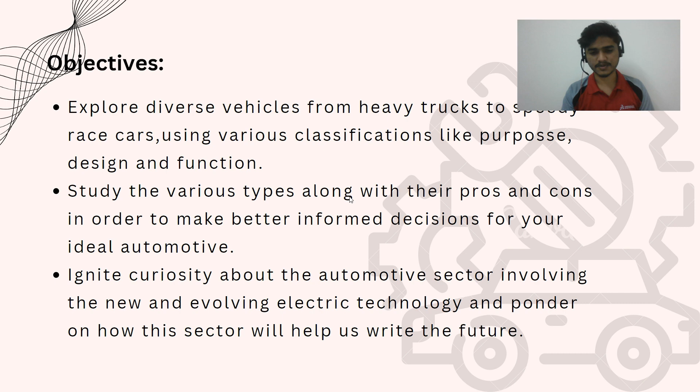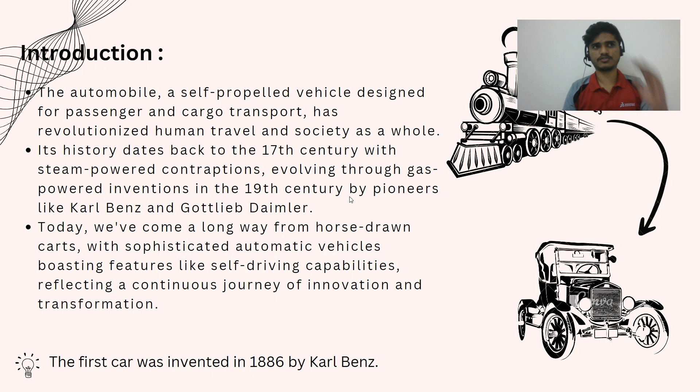Now, getting introduced to the automobile, let's see how it started. The automobile, a self-propelled vehicle designed for passenger and cargo transport, has revolutionized human travel and society as a whole. Its history dates back to the 17th century with steam powered contraptions, evolving through gas powered inventions in the 19th century, where pioneers Karl Benz and Gottlieb Daimler started this automobile industry. So today we have come a long way and we are seeing so many supercars and high speed vehicles which are touching the sky in terms of technology.

Now let's see the components of automobile. So there are chassis, suspension, and powertrain. Looking into the chassis, it's the foundation which provides structure and support to the automobile.

Then suspension is some sort of comfort part which absorbs bumps and ensures stability and handling, so it also contributes to the control over the vehicle. And then powertrain, power plant of the automobile, is nothing but its engine. So the powertrain converts the fuel into motion, and the power transmission transfers that motion to the wheels.

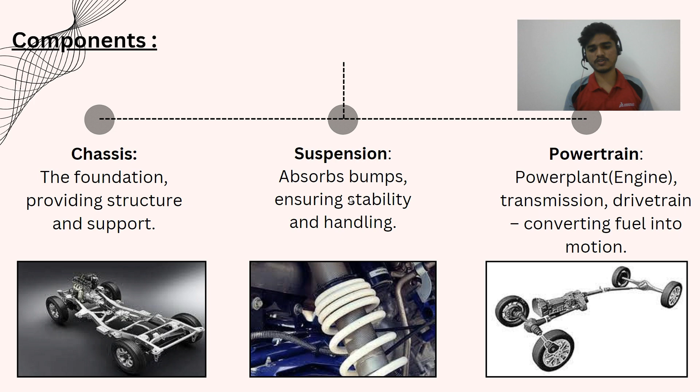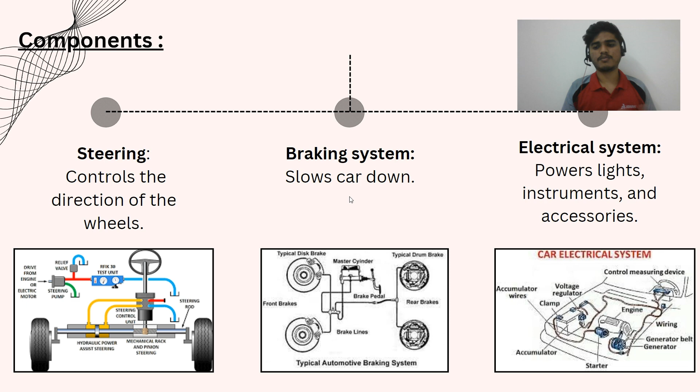Moving forward, there are steering system, braking system and electrical system. The steering system gives you full control of the vehicle in terms of direction, and the braking system is to control the car over speeding and all, or to stop the car. Then electrical system is necessary as more advanced systems are included in our vehicle, and those have become essential nowadays, like power lights, instrumentation and other accessories in the automobile.

So the automotive power plant consists of the automotive engine and other powertrains. The first one is the internal combustion engine. The IC engine is the heart of the automobile. But nowadays various electric powertrains are coming which are replacing the IC engine. We'll discuss later that electricals have some cons as well as pros, but IC engines also have pros on behalf of the electric motors.

Now talking about the internal combustion engine, it is the core component responsible for converting the chemical energy stored in gasoline into the mechanical energy that drives the wheels. The core component of the IC engine is nothing but the piston, crankshaft, and the connecting link, and all that basic piston cylinder arrangement is the main part of the IC engine.

The IC engine works by igniting the mixture of fuel and air within the cylinder, creating an explosion that pushes the piston downward and converts the linear motion into rotary motion using the linkages.

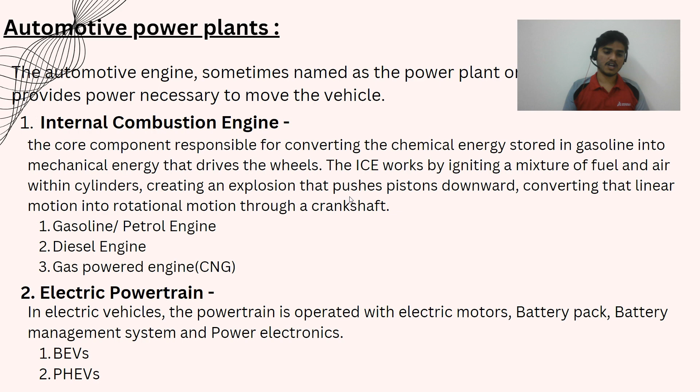Now moving forward, let's see the classification of automobiles. Based on the purpose, there are personal, commercial and specialty vehicles.

For personal use, we use cars in our daily life, like family cars, SUVs, sedans and other small cars. For commercial use, like goods transportation, trucks and buses are used, also for long distance traveling we use buses. Then specialty vehicles like sports cars, off-road vehicles, or vehicles for specific purposes like ambulances are there.

Based on power plant, the power system by which we give power to the automobile, there are various types. The first one is IC engine, as we have discussed previously. Then electric vehicles are there. Then hybrid vehicles are also there, which are a mixture of internal combustion engine and electric vehicles.

Alternative fuels are developing nowadays to reduce the pollution created by internal combustion engines and electric vehicles. You will say electric vehicles don't make pollution, they emit zero carbon, but to manufacture the batteries, the emission made by the manufacturing process is more than the emission done by a single car in use. So it's not that effective, and we need to see further options for reducing pollution caused by automobiles.

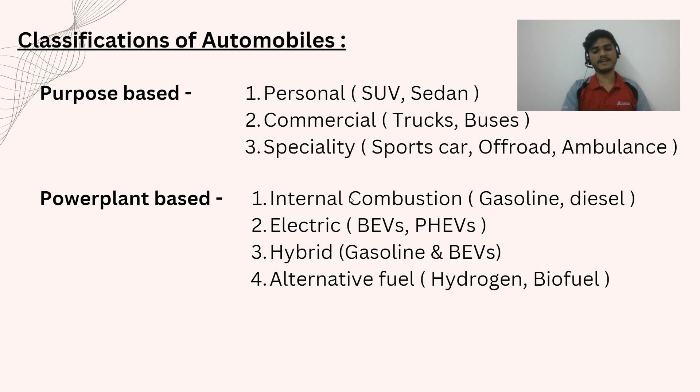Now based on size and capacity, there are compact two-seaters, four-seater, seven-seater vehicles. So compact vehicles, SUVs, mid-size and large trucks are also there.

Now based on the drivetrain, rear wheel drive means the rear wheels have the power. Then front wheel drive, as the name mentions, only the front wheels have power. Then four wheel drive means all four wheels have power, and all wheel drive means we can change the power.

When we want power to only the rear wheels, we can give power to only rear wheels. If we want power to the only front wheels, we can give power to only the front wheel. Or if we want power to all four wheels, we can give power to all four wheels. So this type of customization or accessibility we can get in all wheel drive.

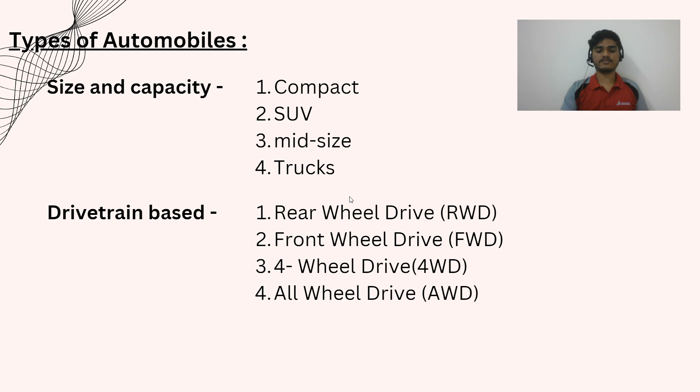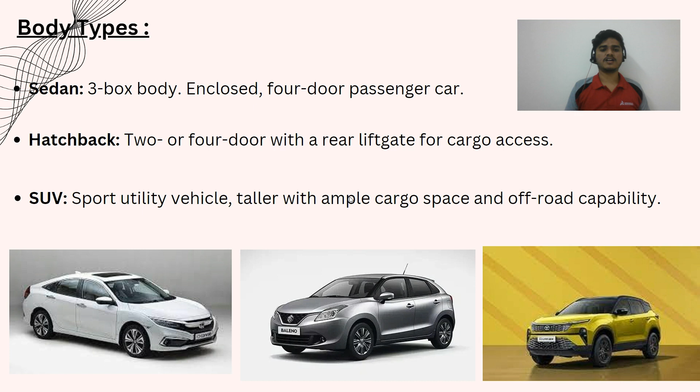Then SUVs, the sports utility vehicle. SUVs stands for sport utility vehicles. They are taller, have much more cabin space as well as cargo space, and have off-road capabilities. They have much more power than the normal sedan and hatchback, if we compare the same range vehicles.

Now in body type, there are different trucks. Trucks are modified according to their purpose. If they are transferring goods, there are different types of trucks. If they are transferring other automobiles manufactured to the showroom, there are different types of trucks. So according to the purpose, the body or shape of the truck is changed, but the main framework and chassis remain the same, just the cargo carrying design is changed.

Then a closed roof two door passenger car with a three box body, engine and passenger compartment. Then convertible, meaning the rooftop can be removed or it can be used with the rooftop.

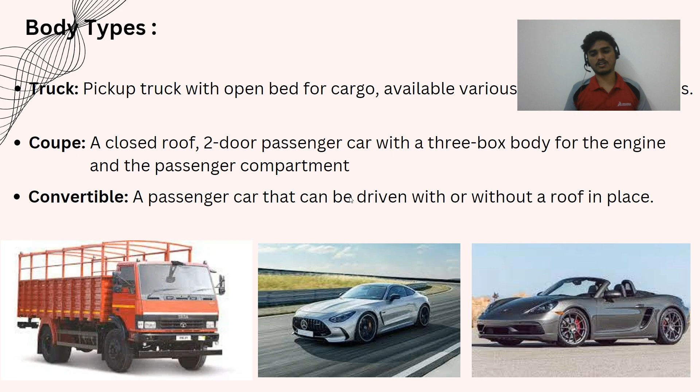Now we'll see the vehicle layout. There are different types of vehicle layout, meaning the placement of the engine or power transmission system, or the placement of the wheels. The first layout is front engine rear wheel drive, meaning the engine is placed between the two front wheels, but the power is given to the rear wheels. So there is one power transmission shaft which transfers power from front to back.

Its advantages are fun to drive, more responsive and better handling. It gives more response as we are using power shafts to get precise and accurate power, what we call gear ratio. They are more powerful, like low torque steer and better performance, with balanced 50-50% weight distribution for better cornering.

If the engine is placed in front and we give power to the rear, the weight of the power transmission system, engine and wheels is transferred all over the body, so there is no weight concentration. But this setup has some disadvantages, like struggling in snow and rain due to rear wheel drive only, since it needs to push.

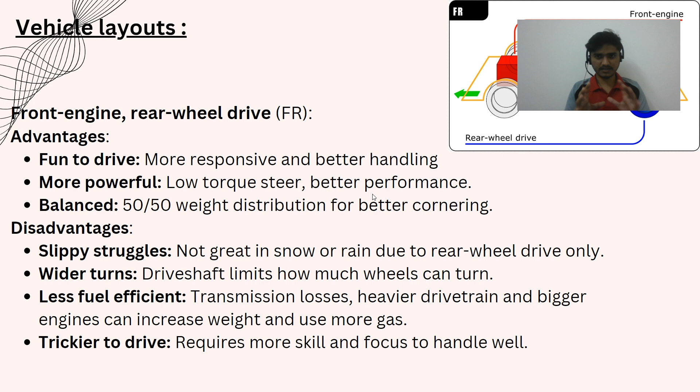Then less fuel efficient - the transmission system has many losses, which ultimately reduces efficiency. And it's trickier to drive, needing some basic skills and focus to handle.

Then front engine, front wheel drive - small cars and family cars have this type of configuration. As its name suggests, the engine is placed in front and power is given to the front. So we'll see its advantages.

It gives more space in the cabin as well as cargo. Then good fuel economy, better traction in snow and rain, and easy to drive are there.

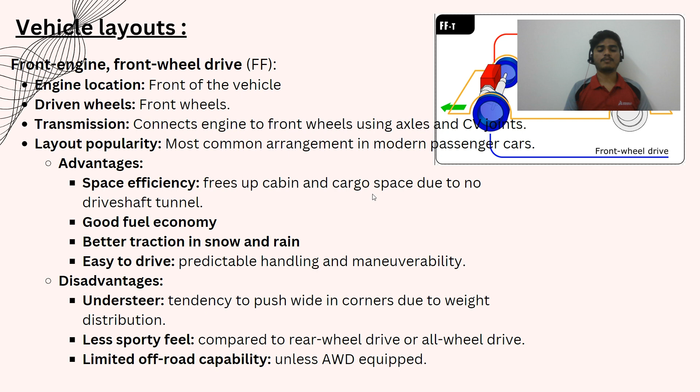And disadvantages are understeer, meaning steering is limited, then a less sporty feel since it can't be handled in a sporty way, and limited off-road capabilities unless it is all-wheel drive equipped.

So rear engine and rear wheel drive - as the name suggests, the engine is placed in the rear as well as the transmission system, and the power is given to the rear wheels.

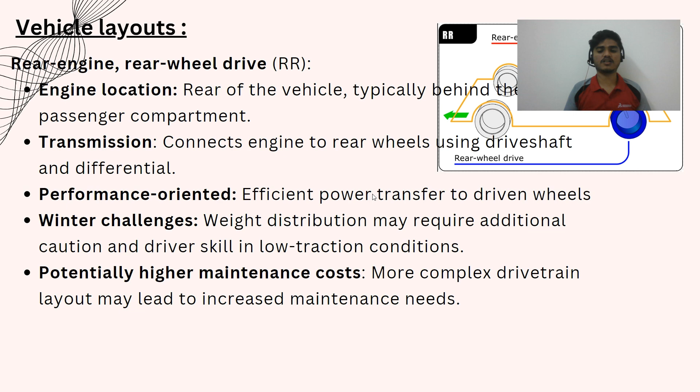It is mostly used in supercars as it is performance oriented. The efficiency of the power system transferred to the wheels means the full power of the engine can be utilized, and it has potentially higher maintenance costs since it needs a very complex power drivetrain to get such a layout.

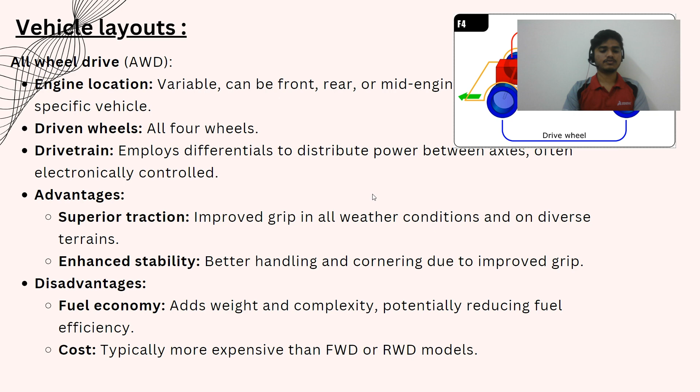Then all-wheel drive, as I explained before - the power is given to the front wheels as well as the rear wheels, but the engine is placed in front. Next, we'll see electric and hybrid vehicles.

An electric vehicle, the short form used is EV, is a vehicle that uses one or more electric motors for propulsion, meaning providing power. It can be powered by a collector system with electricity from extravehicular sources, or it can be powered autonomously by the battery, sometimes charged by solar as well.

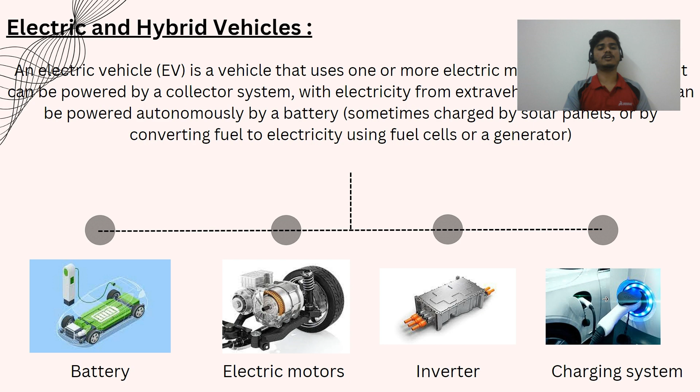So by converting fuel to electricity using fuel cells and generators, there are basic components - batteries, then electric motor, then inverter, and charging stations are required to charge the battery.

Hybrid technology vehicles offer a compelling middle ground between traditional gasoline cars and fully electric vehicles. As I mentioned before, they combine the electric motor and the gasoline engine to create a unique driving experience with several advantages, helping to get the benefits of IC engines as well as electric vehicles.

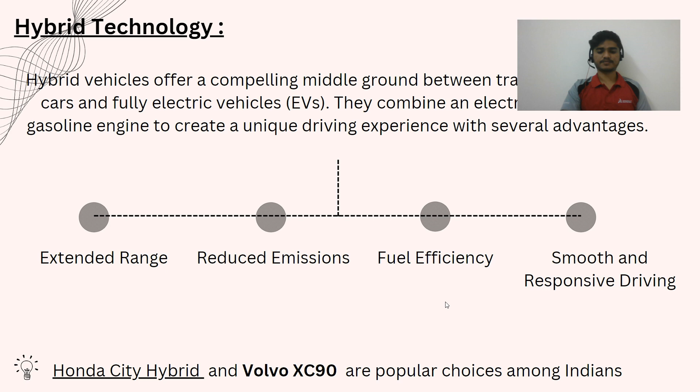It gives extended range, reduced emissions, fuel efficiency, and smooth and responsive driving. One example is the Honda City hybrid, and Volvo hybrids are also there in India.

Now in conclusion, we'll see first the legacy of innovation. This automobile industry has witnessed remarkable evolution of automobiles, from early prototypes to today's marvels.

A spectrum of choices - exploring the diverse classification, understanding each vehicle's role and empowering informed decisions. Gearing up for sustainability, we highlighted the rise of electric and hybrid vehicles, paving the way to a cleaner and more efficient future. But there are more conflicts on this statement as well.

A glimpse into the horizon - we briefly examined autonomous driving, hinting at its potential to revolutionize road safety and convenience. Talking about this, there are various autonomous vehicles, meaning vehicles which can drive on their own. There is no need for a driver to control the vehicle or keep it on the road. Companies like Tesla are revolutionizing this automobile industry.

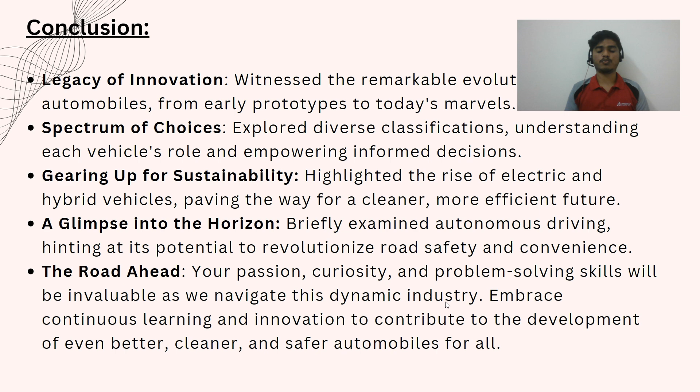And the road ahead - your passion, curiosity and problem solving skills will be invaluable as we navigate this dynamic industry. Embrace continuous learning and innovation to contribute to development that is even better, cleaner and safer for automobiles and for all of us. So thank you, here is the end of this video.